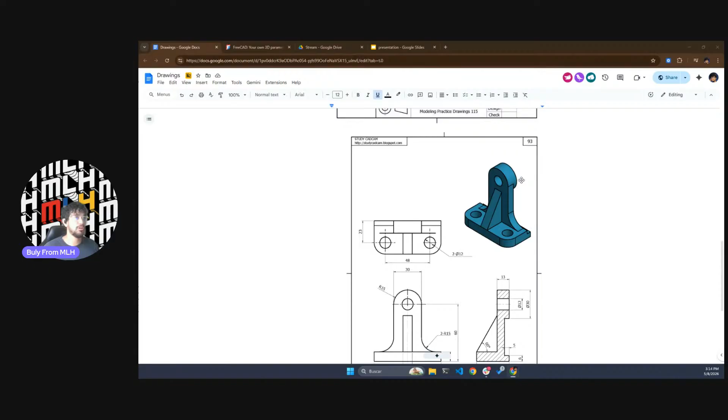Yeah, cool, okay so open 3D CAD, I'm sorry, FreeCAD. Where's FreeCAD? What? Hello? There we go, FreeCAD here. FreeCAD is opening, I can hear my fans at 100%. There we go, cool, okay this is FreeCAD.

Okay, this is how it looks like. These examples are not mine, these are examples that FreeCAD gives you. You can click on them, play with them, kind of learn with them. We won't be diving there. We have a lot of things here, like BIM architecture, empty files, open a file. If you have a CAD file, you can open it. A whole assembly, this thing right here is an assembly of pieces, so you create each piece separately and then you can anchor them together to create a whole piece.

And the parts, which we'll be working on today. Okay, cool, click on part, I think it's parametric part, and then God it's horrible. Okay, you have this, ta-da! No, what is this? I'll explain the basic things. We won't go through all of the buttons and all of the functions, just the basic ones, okay?

You can see we have the unnamed project here. Yes, you can see we have the body, and then we have the origin of it. I'll explain this a little bit in a sec.

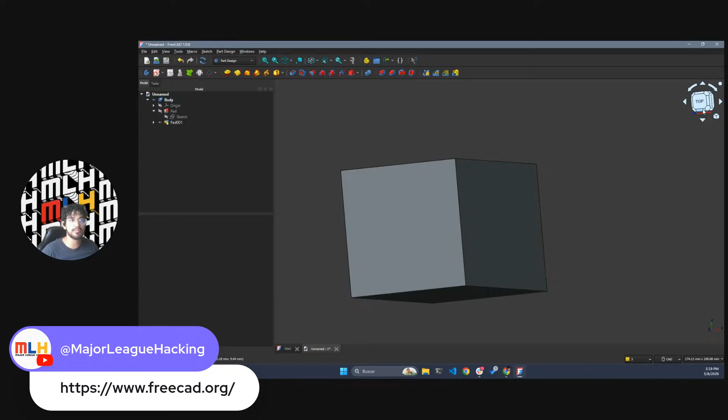So you can see this is a block. Okay, hey, I'm just seeing a square. Well, it's a block. If you click on this, the scroller button, click on it, and then click on shift. I'm sorry, what was it? Shift, control, no, right click? Oh yeah, so it was right click, and then shift, and you can move the part. Check that out, okay, and you can see this little map moving, right?

See that, yeah, okay, so again, right click shift to move. Okay, now hey, I want to move like sideways, not rotating. Click on your scroller and just move it around. See that, make sense? Yes. So again, right click shift for this rotation, click on your scroller and you're going to move in the same plane differently.

And right click gives you a little bit of a function, and your usual left click gives you a little bit of a function. For example, you can click on this space right here and start designing just on top of it. Okay cool, any questions?

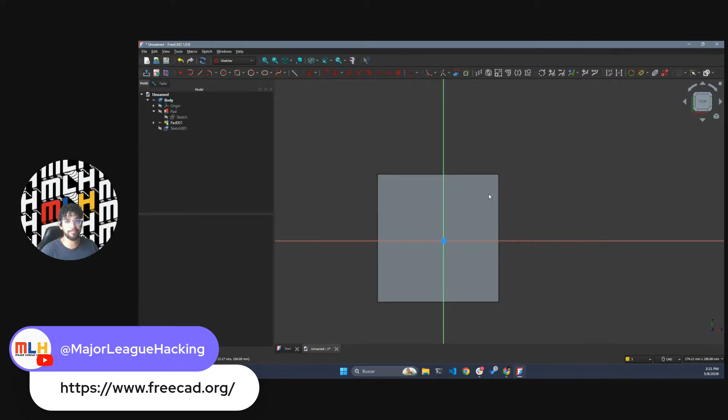Cool, yep, awesome, okay, so let's just open a new one. Oh, I said open a new, nope, no new. Should I maybe get rid of this one? Yep.

Should I open a new one? File. Can I create a new piece? I'm not sure. I have to save it. I don't want to save it. Okay, close this, I don't want to save it. Okay, I'll open FreeCAD again. There has to be a better way to do that, okay? Yeah, for sure, we're gonna do them together.

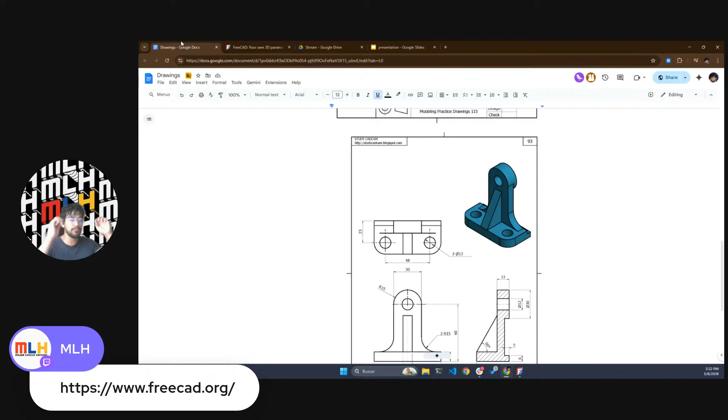But yeah, okay, so again, parametric part, okay, I'll leave this one on. Okay cool, now with the link that I shared, you can see, ta-da, you can see this. We won't be able to create this entirely, it takes a little bit of time, and we have an hour and 40 minutes, but I'll give you a rough idea of how to do it, okay? And then we'll go through 3D modeling, which is an interesting part of this. Cool, now you can see this is the usual schematic of the piece.

And maybe the first thing you'll say is, where do I start? That was great. Oh, that was beyond epic.

Okay, let's locate a center. Do you have... why don't I have music? Better? Okay.

So let's locate a center, and that center has to be strategic, at least for us. It could be this one right here, or this other center, or here. I like this center, this part right here, I prefer it. I think it's the most centered part in the whole drawing. So let's go with that.

Okay, cool, I'll open my iPad. It should be here, give me one moment. Good, I'm back, apologies, cool.

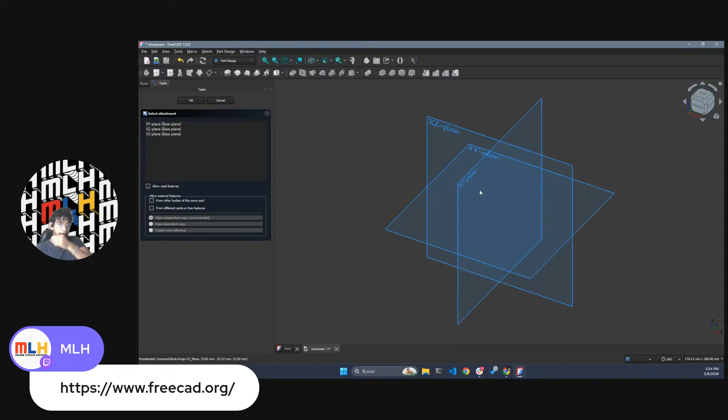Okay, so now the first thing we have to do is what I just did in a hectic way. I'll click on body, then click on this button right here, which has an icon like a paper with a square and a circle. Then you'll be given three options: the XY plane, the XZ plane, and the YZ plane. The one I prefer, and it's a personal thing, is the XY plane. Double click on that and you'll get this view.

Now why do I prefer the XY plane? I don't know, I guess I'd like to have Z as my third dimension, not Y. Some people have Y and Z as the front, but I like having Z as the third dimension. Cool, so you can use either plane, it's the same thing.

So far so good. Now we have a center here, you can see we have a point. That point is our reference. Okay, so let's start designing the piece.

Circle, circle, very easy, circle, circle. Go to FreeCAD, there's a circle icon here, can you see it? Click on that circle icon, then click on the very center.

And once you have it, don't just click on it and let it sit. Just click once, and you can see it changes dimensions, like it grows or it shrinks.

If we go to our design schematic, let me zoom in a little bit more. You can see that this circle right here is referenced with this weird symbol, 1.750. What does this mean? This weird shape, a circle with a line crossing between, it's your diameter, meaning twice the radius.

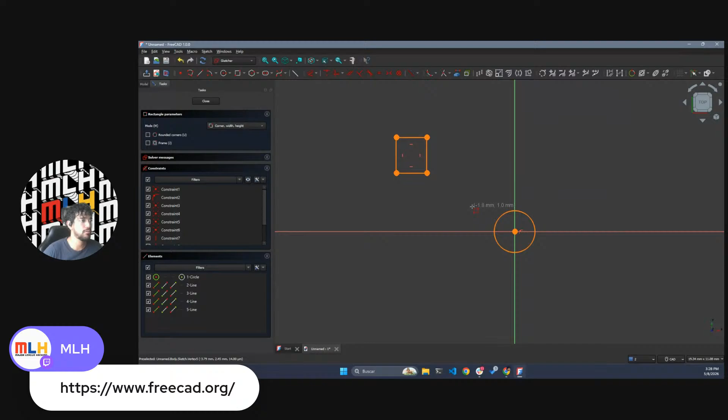Is that FreeCAD? Are you kidding me? Wait, if I want to create a new one here, why is it over constrained?

Why? So when you get a green color like this, it means your shape is constrained, meaning it won't move. Let me try to move it - it won't move.

Let me just get rid of this one, get rid of this point. Can I? It's maybe the over constraining thing. No? Yeah, okay. Maybe I'll create a circle right here. This one's white, and it can move freely.

Yeah? We don't want white stuff. That sounds weird, but we don't want white shapes. We want them green, okay?

For example, in this case, we can say, hey, point, click on control, and then point. You can see both points are selected, they're in green. Go to right click, and it says constrain coincident, constrain horizontal, vertical, perpendicular.

In this case, because we want both points to be touching, we will make them coincident. Voila. Now, why is it white? Even though I can't move it, I didn't set a correct dimension for this.

So again, I'm going to click D, the letter D, and now I'm telling it, hey, it's 1.750. Again, it's too small. There we go. Yep, and it's green. I can't move it - it can't shrink nor grow. Yep, it's constrained. Okay, cool.

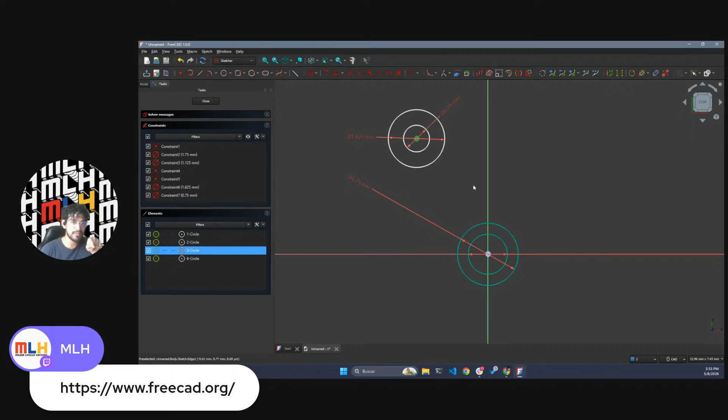Ooh, see that? If we take this, click on this point, hit Control, don't let it go, and then click on your y-axis. It's green. It was green, it's green now again.

You can let Control go, and then right-click, and we will... Oh no, actually no, it's not constrained. Click D, and you can see we can add some measurements here.

It was 0.750, like this. That makes sense. See this line? And then see that the circle is a little bit over the line? It's kind of the same thing.

It's still white. What? Oh, we constrained it to the y-axis. But what about the... oh, I'm sorry, we constrained it in the x-axis. It means it doesn't go left nor right.

But it goes up and down. Do we have a measurement for that?

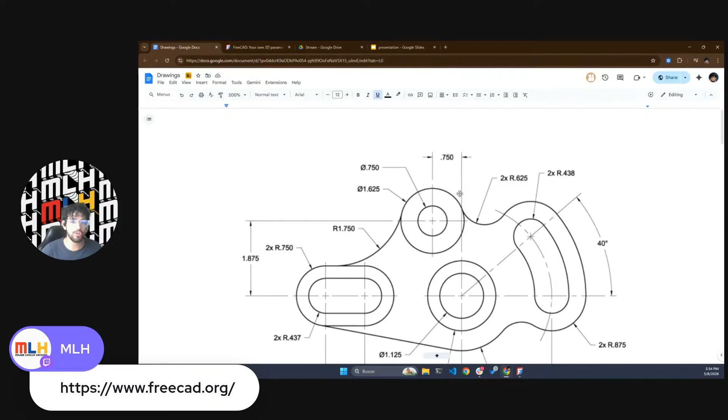And we do. From this center to this center right here, you can see we have 1.850 - I'm sorry, 1.875. Go back.

This and this. D as for dinosaur, 875. Cool, we got it. Give me a...

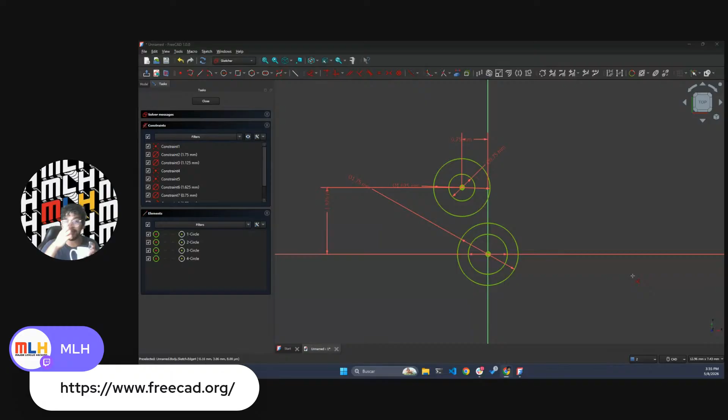Okay, I'm back, sorry. Yeah, for people who didn't hear me say it, I have a flu, the worst flu ever. It's really warm and I left my AC on all night yesterday, so my throat is killing me. Okay, let me just take a little break.

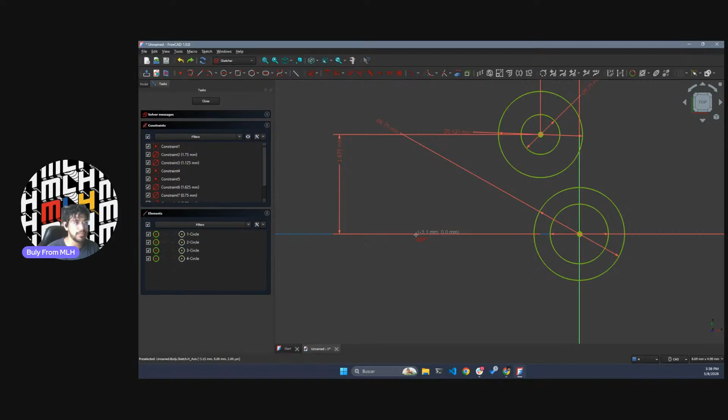So you can see again that this pill shape is in the center, and its centers are actually in the X plane. So go back to FreeCAD, click on the pill shape, and then for this just hover your mouse over the X plane, click once. I just clicked once and it grows with your mouse. Okay, so I'm not clicking, I just want it to grow a little bit more, keeping my mouse over the X plane.

Maybe like this - click - and then it allows you to make it either bigger or smaller. I'm not clicking, okay, I'm not clicking, I can move the mouse. I'm hovering the mouse, I'm not clicking. When you click is when you kind of select, okay, so...

We can measure it, and that's what we'll do. But just close eye, maybe right there. Okay, I clicked, and that's it. Same thing, click on again the pill shape, click on this center, click on this center right here, and a little bit smaller this time. Click here, voila.

Redundant, yeah okay whatever, do I have redundancy? Wait, what? Okay, there we go. Cool, so that's it. Okay, now this doesn't look like this, but we have measurements that we can follow. And check this out, here we have 2 times 2x, or 2 times R750.

Unlike this weird shape, R stands for your radius. Okay, so the radius of this circle right here, the bigger circle, is going to be 0.750. Okay, so...

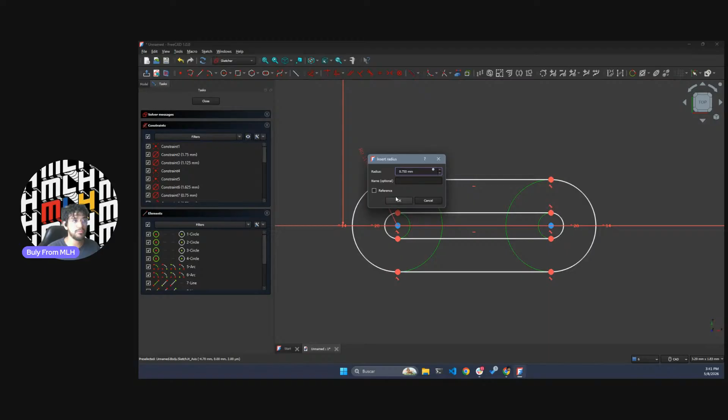D - now it gives you can see it gives you the R option and it says radius. Now the radius was 0.500. There you go - 750. Okay, see that, now it grew, and it kind of resembles this bigger pill.

Let's do the same. Now why does it say 2 times? Remember, we have one circle and we have another circle. Because we're using this pill shape, it automatically adjusts both circles, but if you're doing it by scratch, you have to adjust both circles.

Okay, go back to our schematic. It says 2 times again - 437, 0.437, that's the radius of this one. Again, scroll, click on this circle, kind of just put it right here, and then write 0.437.

0.437. Now careful, this for some reason has micrometers - it has to be centimeters. Actually millimeters. Yep, there we go.

Cool, so far so good. You can see this, now it's not green. I click escape to escape the dimension key. Okay, so I click D and I have this - can you see it? It's like a reddish icon under my cursor, meaning I'm using the dimension option. If I want to exit that option, click escape. See that? Now it's a normal mouse.

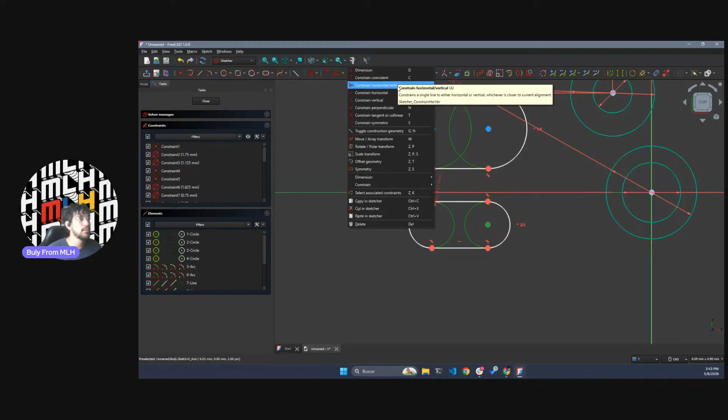Click on the center, control, and then click on the X plane, right click here, and then it says constrain coincident - it means it's going to coincide. Yeah, so it's going to touch. Okay, 3, 2, 1. Ta-da!

Same thing here. Now we can click on this center, click on this center with control. So again, the steps are: click, hit control, don't let it go, click on this center, let the control go, right click here, and then coincident. Ah, there we go. Okay, now you can see that these two are not coincident.

Yep, it's okay for now because we have the measurements here. Okay, so we can see that actually both lines, this one and this one, are actually the same length. Can you see that? Here, it's the same. The thing that changes is the radius of the circle.

Okay, so in this case, let's coincide the centers. So again, click, control, click, right click, coincident. Ta-da! Okay, now you can see it's still white because those lines have to be measured.

Okay, let's click on this line, click D. You can see the measurement here, put it up, and now I don't remember how much. Oh, 1 centimeter - okay, so it's 1 millimeter. There we go, see that?

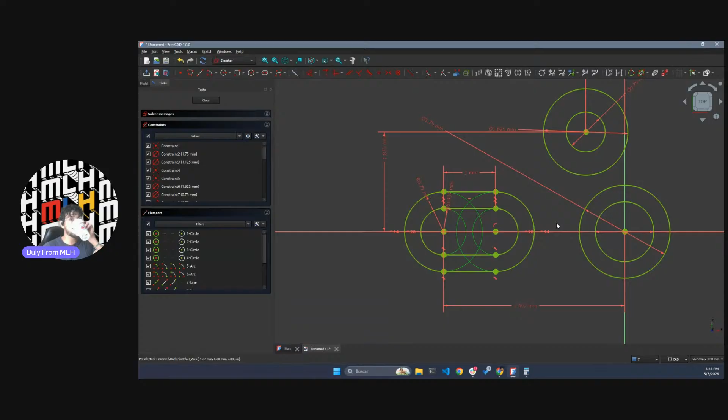Next step. Okay, not Slack, this. Now, this is a little bit not very intuitive at first, but when you get used to it, it's easy.

Okay, you can see there's an arc here. See that? There's an arc, and it has a radius. And you'll say, hey, why would an arc have a radius? Why doesn't it have like an angle, degrees, instead?

Because when you're designing or drawing, you usually use polygons and circles. So if you think outside of the box, this is a circle that goes like this.

That's the worst circle I've drawn. Do I have a pen? Oh, I have a pen. Oh, cool, nice. Do I have a pen? Oh, here it is, editing mode. Nope, is there a pen option? Insert. Say what? No, right? Mode. Editing, no. Ruler on the, I don't know.

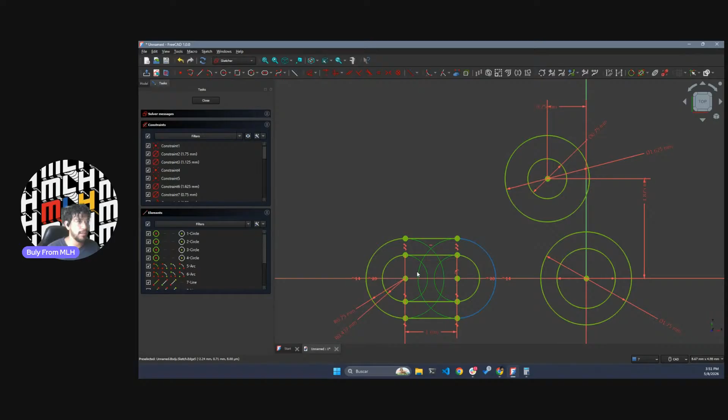Okay, so you can see it's kind of from this point all the way up to this point. It's kind of from this point all the way up to this point. Okay, so we have two options.

We can create a circle, match the radius, and then cut it, or we can use the arc by center. You have a bunch of options: arc by center, arc by 3 points, arc of ellipse, and more. Let's use the center one.

Now, why is that? We don't have a center here, right? There's no center. Well, we know that the center from this point to the center, it's 1.750 because it's the radius. Okay, let me paint it. Why not? Maybe this is easier to understand. We have a circle.

We don't have, it's like, maybe like this. We have it like right here, like this part is not, something like that.

Okay, we know that from any point in the circle to your center, it has to be the radius. So from this point to this point is radius, this is radius, this is radius, maybe this is radius. Okay, how will you know the circumference of that portion of the circle? Ah, you got it. You just know by the fact that it touches tangentially this pill and this circle.

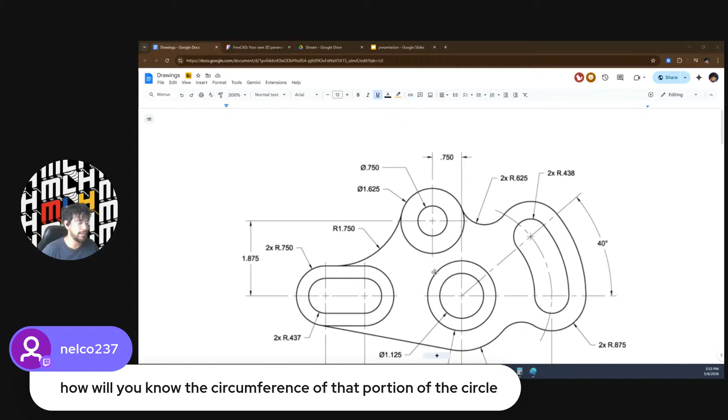Okay, now let's do it. Maybe it's easier if you see how we do it. Click on the arc option, and it'll ask you - I think the first one is the center. See that? What was the measurement? Remember, it was - oh shoot, I'll just get rid of this. 1.750. Enter. And then we have the circle.

It's not where it's supposed to be, but bear with me. Now let's draw where the circle or arc is going to be. We can just theoretically draw it from here to here. It's not placed where it should be, but that's the next step. Let me repeat this: arc by center - you don't know what the center is, okay, but we know the radius.

Click on wherever you think the center is going to be - it's not important. Now you see there's one arrow, and that arrow means it's the radius, 1.750. You can see it here, R, yep.

And then I'm not clicking, I just hit enter, and then I have the option to draw from where to where the arc is going to be. We know the arc has to be from this circle all the way up to this point, so we can draw it from the point all the way up to maybe this point right here. Now I still have the arc option - I click escape, and now I have the regular mouse.

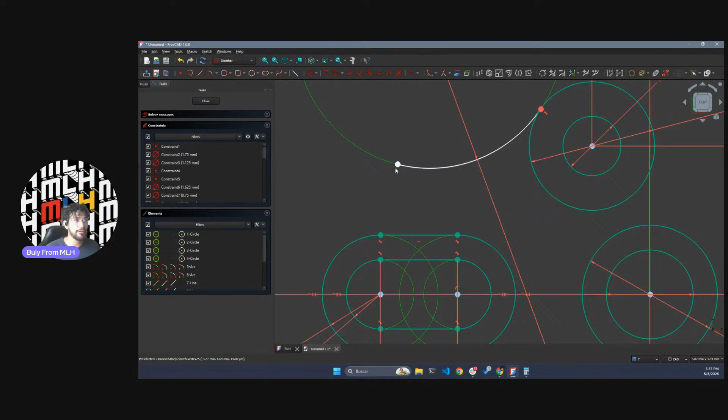Now we have the radius. We don't know where exactly in the circle it is, but we know that this end of the line and this point are coincident. Click on your point, click Control, click on your other point, let it go. Right click in space and coincident. Oh, there we go, now it's green.

Now maybe you'll ask yourself, what the heck? Wait a minute, this shouldn't happen. Maybe I'll remove this. Ah, then we got something wrong. Wait a minute, yep, I see that. Is the radius okay? 1.625. 1.625. 0.75. Yeah, that should be it.

Let's do it again. Let's tangent this. Ha! Wait a minute, give me a sec.

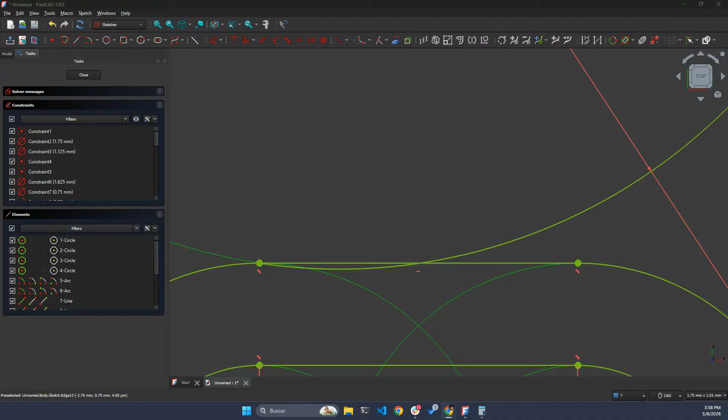I'm back. Okay, nelco says from the diagram it's hard to see that. I think it stops before. Oh yeah, for sure, it has to stop. This doesn't make sense. But 1750, did I get it wrong? Maybe there's something wrong in my schematic, maybe this is taller than it should be. 437, 437, 750, 75, that's fine. Yeah, that's weird.

Okay, I have an idea. Let's do something, you can see this icon here: halfway between two tangents. Yeah exactly, let's tangent it instead of coincident it. That's actually really good, really good, Michael.

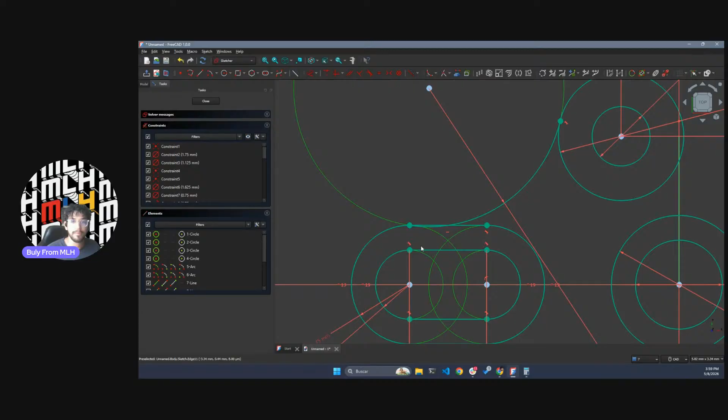Okay, remove this. Click on this red icon, which is like a line in a semicircle. Click on it and then hit delete. Now it's turned to an aqua color, that means we can move it.

See that? Oh wait a minute, what? Oh good, I just removed one that I didn't want. Okay, let's redo it. No, let's redo it, I said redo. There we go, so we're here.

Again, same step as before, I just Control Z everything, okay. Tangent this, and then click on this point. Control, click on your line. Is it in the line? I think it's in the line. So click on the line, right click, tangent. Ah, ta-da! There we go.

Yep, now it's not overlapping, so it's a little bit before. Sometimes you gotta experiment before you do it, because in the schematic it doesn't say where. Yep, but now it's green.

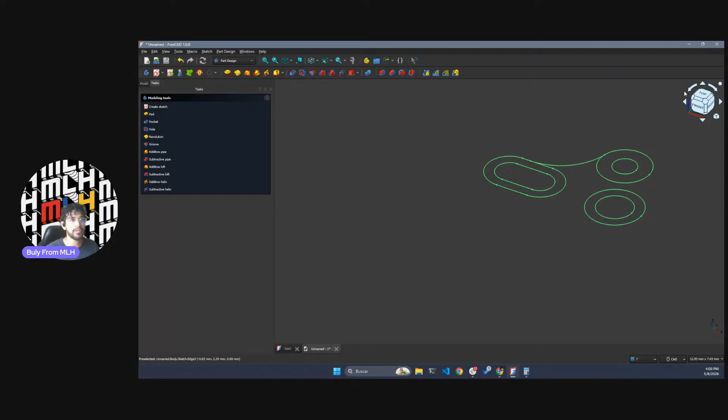See that? I can move it around. Now if you want to see it without the measurements, hit escape. Cool, now this is what we got. Now we know the basics, okay? Now this is taking too much time, let's go for this piece, okay?

If you want to continue with this piece, I can challenge you to do it, but later, this is not a pill. For example, you'll create a circle, another circle, and create two different arcs, and then just cut the circle right here. You can use the cut function. Cut, there we go, this one. It says create fillet, okay? You create the fillet and then you cut. Now everything is green, so you cannot cut. But yeah, just experiment with that.

Awesome, so let's just leave this drawing aside. We got the basics of how to do it. Let's go to 3D. Let's close everything, don't save. Parametric part again. Model, and we are back in the blank.

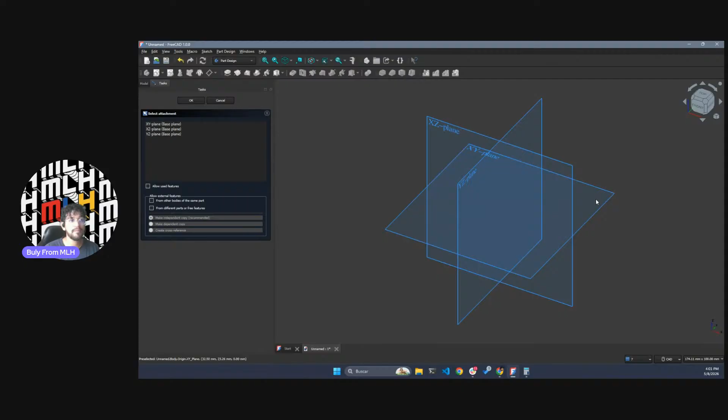Okay, remember what the first step was. Click on your body, and then click on this icon, which is the sketching icon. Now first time it says, hey, where do you want to draw? Again, I like XY plane. Double click on XY plane. Cool, yep, all good, nice.

So this is going to be more fun. Now you go like, what the heck, where should I start? This is hard. It's not, you get the hang of it. Okay, let's do another one.

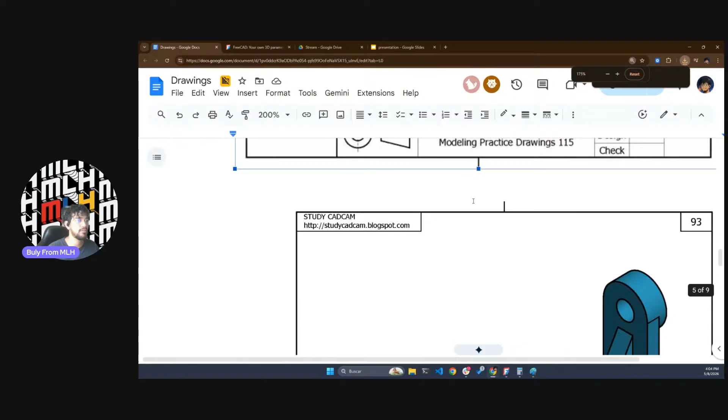Yeah, let's screenshot this part right here, from here all the way up to - oh, this is important. Okay, now I'll open this with Paint. Gotcha, thanks, nice. Okay, so we got this. I wanted to do it in Paint so we can use colors with this.

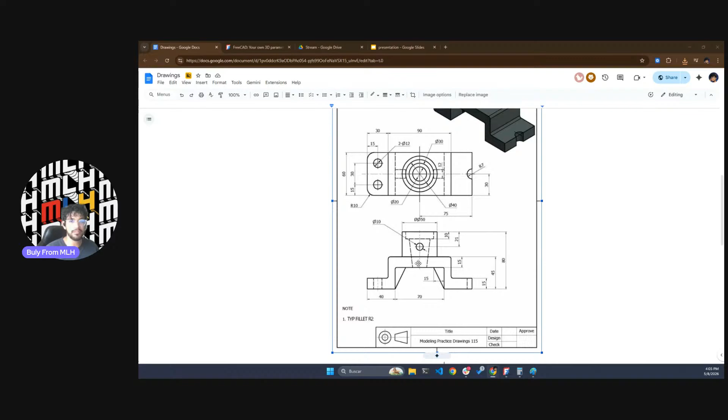Cool, so check this out. We're going to do this silhouette, this one right here. You see, it's just one shape, and then you do 3D on it. See that? Let's do it. So we start by creating the shape.

How do you do that? Easy - go to your lines, click on the line icon, and click, drag, click, drag, click, drag, click. That's what we're going to do. Again, click, drag, click, drag, click, drag, click. Okay, do it with me. Click. Okay, try to. Let's do it.

Should I? Okay, maybe - don't click yet. So click, drag, and then hit tab. You see that we went from the measurement, like the actual size of the line, to its angle. Let's do this, 0 degrees. See that? Now the line won't toggle, it just grows. So click.

First line, which is this part right here, this line right here. Let's do the whole shape. Again, click, tab, minus 90 degrees, enter. You got a line, maybe somewhere around right here. Yeah, and then a vertical line - I'm sorry, horizontal, vertical, horizontal.

Okay, let's do it real quick. Like this, 0 degrees, enter. Click. From this point, click, drag, tab, minus 90 degrees, so it looks down. Enter, click. Yeah, what next? Then a line maybe somewhere around here. So this line stops here - it doesn't have to be exact, we're going to measure it later.

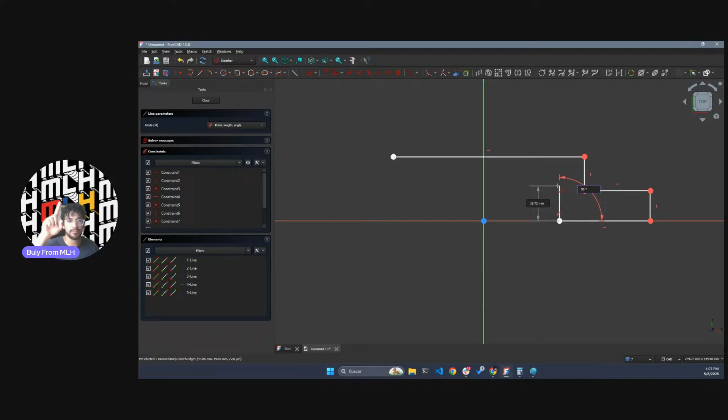Line, tab, 180 degrees - yes, it doesn't move. And then maybe somewhere around right here, same thing here - up, 90 degrees because it's 90. Enter, click, click, drag, tab, 0 degrees is okay. Yeah, whatever, oh, so change it to 180. There we go, so it goes backwards. It's somewhere around right here.

Click, click on the point, drag down, tab, minus 90 degrees, enter, click, click again, drag, angle is 180. Yep, right here - click, drag, 90 degrees, enter, click, click, tab, 0 degrees, drag maybe just right here, and then line, tab, 90 degrees, enter, and it touches the point. Oh good, I hope you got all of that.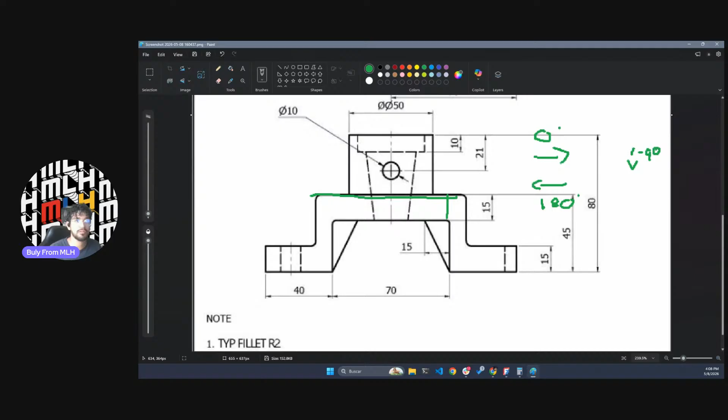Again, click, drag, tab, and then if it's flat looking at your right, it's 0 degrees. So let's put it here - it's right here, it's 0 degrees. If it's right there, it's 180 degrees. If it goes down, it's minus 90, and if it goes up, it's 90. Okay, so again, click, drag, tab, your angle. Click, and then click again where that line ends and start your new line, and you create this silhouette.

Okay, so I'm going to get rid of this. Oh God, okay, say what? Okay, maybe like right there, okay cool, so now let's measure this thing.

You can see that the bottom line is 70 millimeters wide. Go to your bottom line, click on it, hit D as for dinosaur. You can see you have the measurement here, oh no. Click D, and the number was 70. Cool, okay now next line. Oh, you can see this height is 15. Go to your height, click on it. If you had D selected without hitting escape, it automatically does it for you. Click, 15. Same thing for this line, 15.

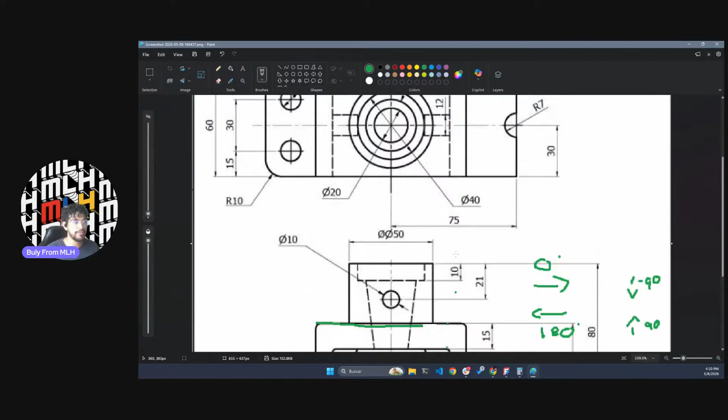Okay cool, we got 3 lines - these 2 lines and this middle line. Now this upper line right here, it kind of doesn't say, right? It doesn't say here, but it does say here, which is wrong. This upper line right here is - where is it? 70, 15, 45. Yeah, it should be 90 then. Yeah, it's 90, see this? Let's look at our schematic again, the complete one.

This square right here, it's this square right here. Okay, you gotta think outside of the box. Just look at the things in 3D, even though they're in 2D.

Let's see, is there a way to just make one side? Yeah, you can mirror one side of it. It's a little bit of a pro move, but yeah, your intuition is right.

You have here... where was it? I think it's this one. Carbon external trim, no, one of these is the mirror. I think it's this one. Just hover over here and you'll find the mirroring. I think it's this one. So you click on everything, and then you mirror it based on this line.

So you just create this part right here, and then you'll mirror it based on this line. So you do like a book, like this. Yep, but let's do it one by one.

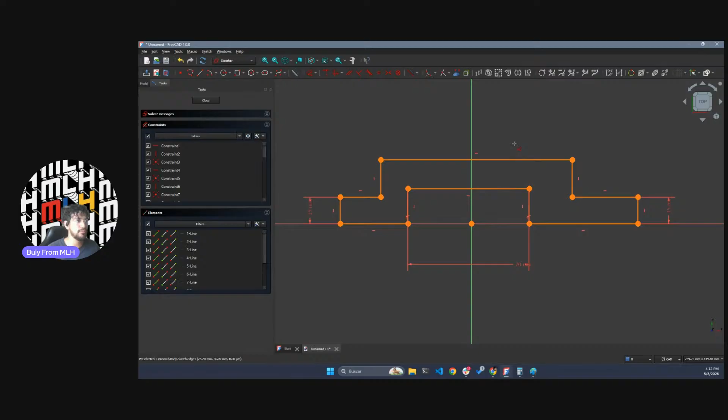Okay, cool. So you can see that this is 90. This square right here is 90. So that means this is 90. Cool, now next one.

Between this line and this line is 15. Okay, so let's do it. Come here, click on line, line, and then we have here 15. Cool, it's still white, we have more constraints to add.

Maybe this line right here should move. This one right here, this one. Let's find it, you can see it's 40, right? If it doesn't tell you, hey, this line has a measurement, then you can infer that this one is the same. So we have 40 and 40.

Okay, go back, click on line. D as for dinosaur, I said D as in dinosaur. 40. Same thing here, 40.

So far so good. Now we know that between these lines is 15, but we don't know the actual size of this line, this one. Go back to your schematic, and you can see it doesn't say, but it says, hey, we know that this one's 15, we know that this one's 15. We don't know what this line is all about, but we know that 45 minus 15 equals 30, and this line should be 30, because it's this 45 minus this 15.

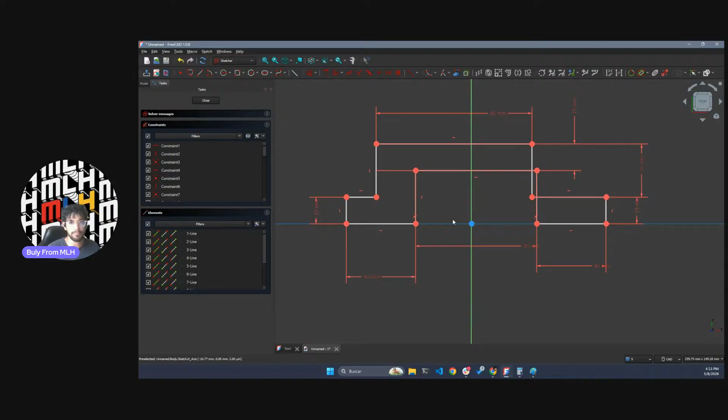Okay, we'll do it. So if this line won't grow, it means that this 30 actually also applies to that line. Again, if you don't know why it's white, move around and you can see that the line that's moving everything is this one. So let's click on the line, and then go back, and you can see this line is actually this line right here.

Can you see it? It doesn't say in this part, but it says here. This line and this line are these lines. But you're just looking at it from up, from the top, not from the side.

Okay, so click on here. D, was it 15? Oh, 30. 30 here, same thing in this line. Okay, it's over constraining, escape.

Don't click on anything, cool. Now, why is it not constrained? You can see it's over the x-axis, but it doesn't know where its center is. Let's let it know.

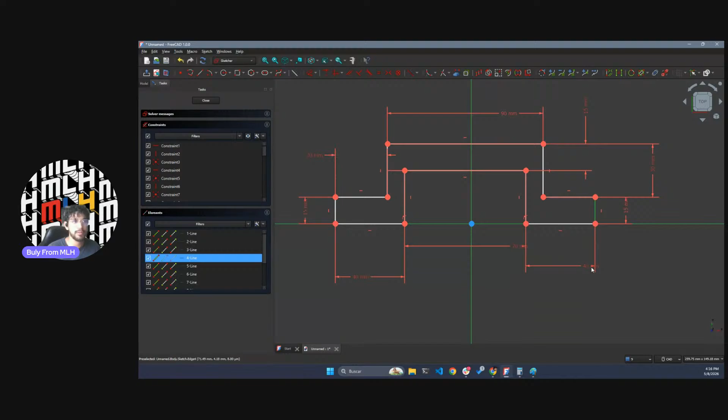Y-axis, control, and this line right here, or actually this line right here. We selected these two lines, and we know from this center to this line it's half of 70, which is 35, plus 40 of this line. So it's half of this, because we have a line here, half of 70 which is 35, plus 40 equals this. I hope it makes sense.

Cool, I'll just get rid of this. Nice, go back here. D as in dinosaur. Oh, wait a minute. Hit, click, click. D as in dinosaur, click. It was 35 plus 40, 75.

Cool, now it's green, and now FreeCAD says, hey, now you're cooking, and now I know what you're doing. You can see that all of it is green. It is constrained, okay?

Cool, so it's constrained. Now what? Click on model, click in this space with one left click, and then hit escape.

Now you can see your schematic as in a 2D drawing, but in the outside world. Remember, control and then right click lets you move it around. Shift and right click lets you rotate it. It's not a 3D piece.

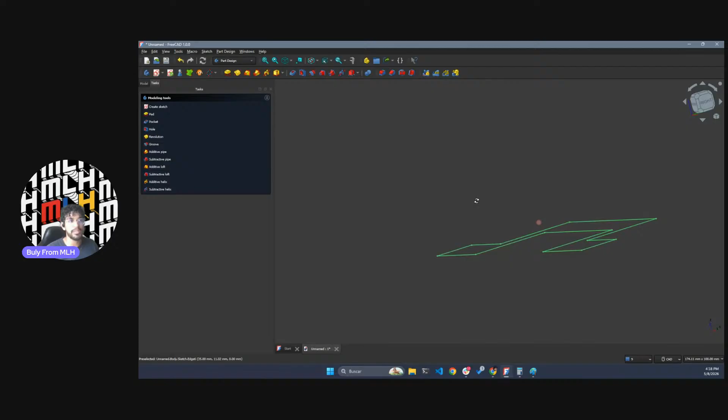Don't hit enter, just click once. And here it says, hey, it's a type dimension. Yes. And what length? Cool.

Go back to your schematic. The length is actually this number, can you see it? It's all of this, it's the whole piece. So it's 60. Go back, and here, 60. Enter.

Ba-dam! You see, from a silhouette, again shift, right click, you can rotate. You can see that this is the top.

Let's rotate the top, clicking on this arrow. This silhouette right here is your silhouette right here. If you rotate it, let's do it like this. If you see it like this, it's actually, look, you're seeing it this way. See that?

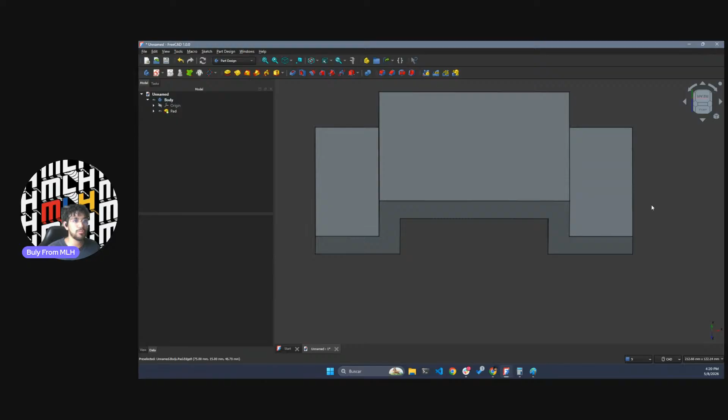Go to your FreeCAD. Click on, with your scroller, click on the scroller. Again, shift, and then right click, kind of turn for you to select this line. Not the plane, not the plane. Line, click on it once.

Scroll out. Yeah, and here you have something called a fillet. A fillet is going to do like a fillet, it's not like an angular cut, it's like a fillet cut, okay, like a round cut.

Click on the fillet. And now it says, hey, I know that you're talking about this line. It actually created a fillet, and it says 1 millimeter. Yep, it's the radius of the circle that it's going to create here. See the circle? This is radius 1.

We don't know, right? Like it doesn't say, ah, but there's a note. Note, typical fillets are R2, 2 radius, or 4 diameter. Okay, 2 millimeters, maybe it's easier to understand. 2 millimeters of radius or 4 millimeters of diameter.

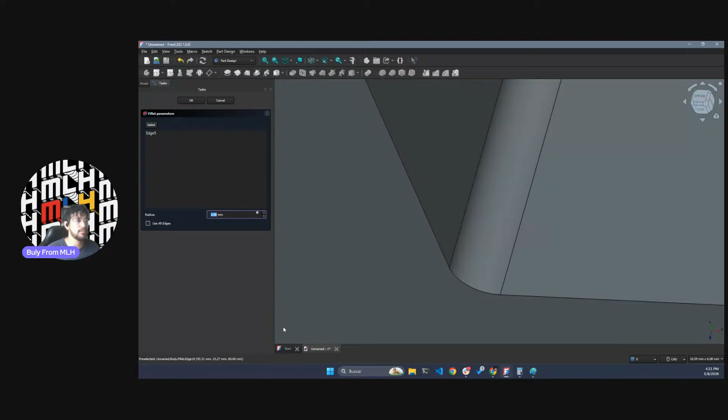Ah, that makes sense. So I go back, instead of 1 it's a 2. Enter. There we go, see that? Now it has a fillet to it.

Bully, we need to do the fillet on every single line. Well yeah, it's easy. Line, fillet, 2, enter. Again remember shift right click, line, fillet, 2, enter. Last one, line, fillet, 2, enter. There you go, see that?

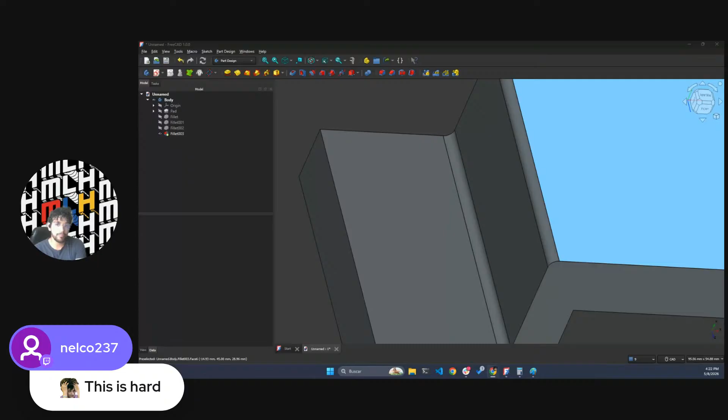Because if we were to create this piece by creating this box, and then another box, and then a box, and then a box, and another box, it'll take forever. You just use your imagination and say, hey, I can do this whole silhouette, 3D, cut, easy peasy. Okay, I hope Nelco doesn't find this hard.

Now, this looks better, right? Let's kind of take a look at it like this. Compare it to our image. See the fillets there? Nice. Bully, there's a fillet here.

You can actually see it here. There's a fillet, and there's another fillet. And it actually says, where's Paint? Here it is. It says this one is R10.

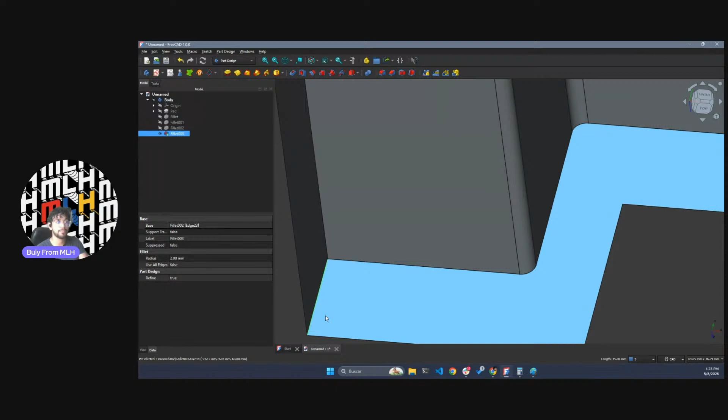Nice, do the same thing. Click on your line, not pane, not plain, line. Go to fillet. Remember how much was it? 10, so radius is 10. Ba-dam! Isn't this beautiful? Same line here, yep, got a line, fillet, 10, enter.

Now this is good, now this makes more sense, right? Can you see this? You can see that this is trimmed, and this one is trimmed. Cool.

Now, next step. Okay, you can see in the picture we have like a circle here, which is like a cut. Yeah, so it's a cylinder that goes down, but it's not a shape by itself, it's a cut. So it's a cut like this one, and this one cuts. You can see we have 2 circles in 1 circle.

Lucky for us, these 3 circles are in the same plane. So what we can do is draw these 3 circles and then say, hey FreeCAD, I want you to cut down, I want you to erase or remove whichever material you have in your way with these 3 circles. Okay, cool, so let's do it.

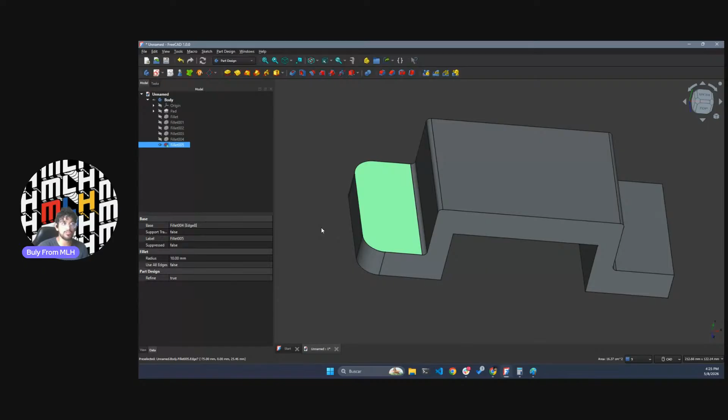Click on either this side or this side, okay? Whichever works, just click once. It turns green, then click on your drawing, sketching tool that we used before. Where am I drawing? What's going on? No worries, you are drawing on either this or this plane, because they are in the same height, so we know you're drawing over this, not over this. You're not drawing here, you're drawing here, which is this part, not this part, this part. Even though it looks the same, we are looking at a 3D shape in a 2D way.

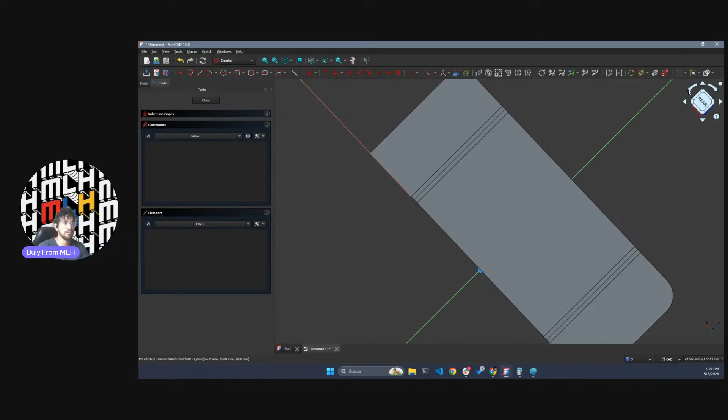Cool, let's orient ourselves. Can I have a decent rear view? Oh, there we go. Now this makes more sense when we look at it like this. So this is this, yep, this is this. Okay, now we have a circle here.

Let's start with that circle. You can see that I want to click on this line because I want to make a circle coincident here. Maybe FreeCAD is buggy. I want to click on this. I can't, because this is a 3D part, and I'm trying to sketch over it. FreeCAD says no, no, no, you can't do it because it's already a shape, it's not a sketch, it's a shape. There are infinite amount of points here, so FreeCAD just says no.

But we have a trick. You can see there's a line and then dotted lines. If you click on this, you can see that all of your shapes now are blue. Click again and they'll become white. What does this mean? If they're blue, it means it's an imaginary line. It helps you locate yourself, like in this case, in a 3D shape. It helps you draw 2D shapes. And whichever line is blue, which is imaginary, created, it won't affect your 3D sketch.

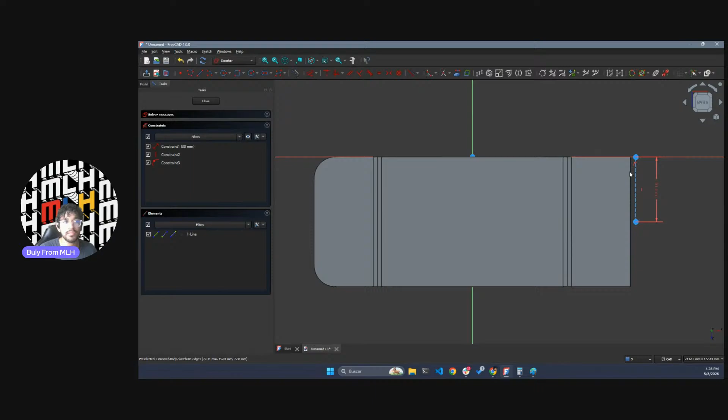It's not coincident with this line, we have the same issue. Not really. We know that from this point, which is 35, yep, 35 there and 35 there. So it's 35 plus what? Plus 40. 35 plus 40 is 75. Remember the calculation we did last time? 35 plus 40 is from here all the way up to the center. Ah, we got the center.

You click once in the center, click Control, click the next center, and then D as in dinosaur. And then, what was it? 75, right? Oh, now we got it. See that? It's not touching physically, but the measurement is the same. It's the same length, so it's there.

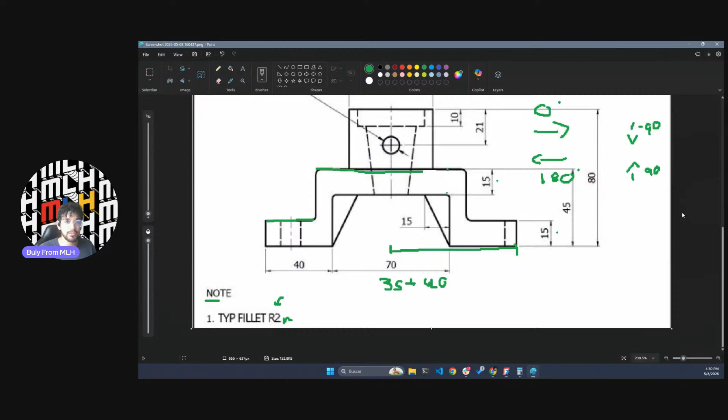Now let's change this to a real line. Click again on this dotted line icon. It's white again. Click to select the circle. Now the circle is going to be in the center. Yep, it's not going to move, but it's going to change its size. Go back to your schematic. R7, see that? It means radius of 7.

Here it's saying, hey, you see the two arrows? The two arrows mean diameter. So it's easy, if we are working with diameter, it means twice the radius. The radius was 7, diameter has to be 14. There we go, easy peasy.

It's already there because we're going to cut. See that? There's a circle. We're going to cut through the whole piece. It's okay if we leave this part of the circle because there's nothing here. So it's okay to leave this part of the circle.

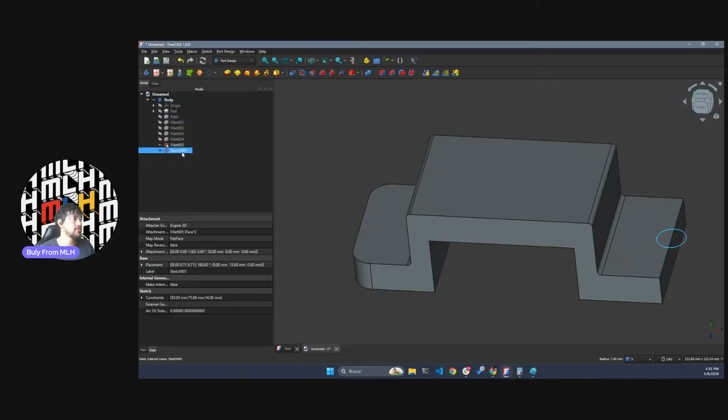Now, if you're feeling a little bit more adventurous, then what you could do is create a line from this point to this point to close the shape. You cannot leave shapes open, they have to be closed, and remove this part. It's just a plus that does the same thing, so we won't waste time on that, okay? Give me one second.

Cool, I'm back, okay nice. So now we got two circles to tackle, one and two. We got this one right, okay, let's do the same thing.

Let's create a line, a dotted line that goes here. It's an imaginary line that'll help us locate ourselves. Okay, go back to FreeCAD.

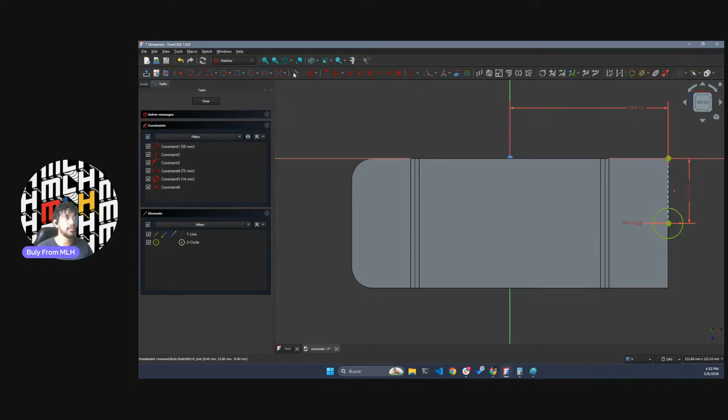We know that we want a line, again dotted line here, click, so it's all imaginary. Click on your line, maybe right here, it's okay. Should be 90 degrees, and the length was 30 for the center. Oh, my bad.

Yeah, maybe, let's see. Yeah, let's do it like right here. It doesn't matter, okay, we just want a straight line for us to locate ourselves. Okay, cool, now.

D here, and then this was 60. Okay, so 60, cool. Now remember, if from this line to this point we had 75, it's the same thing on the other side, okay? So dot, 75, cool. Now this line, you can see it's touching.

Remember, dotted line means imaginary line. Okay, cool, now we will need another line that helps us, which is we can grab the center. Sadly for us, the center is not here, the center is here. So what we'll do is use the x-axis as our advantage.

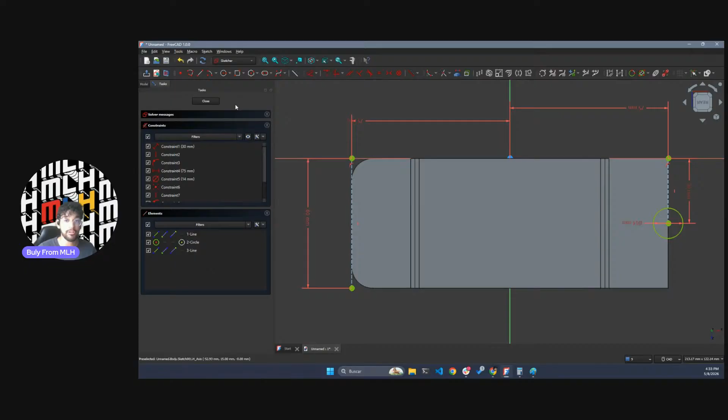Okay cool, so we know, you can see that we have two circles, okay, two real circles. I said two real circles, one and two, yep, just there. Why not? Now I know for a fact that both circles, it says here actually, two of 12 diameter. Can you see it here? It says two of 12 diameter.

Let's go back to our circles. Click on the first circle, click on D, and then 12. Same thing here. Well they're still white because even though they have their diameter, we don't know where they're located in space. We have to stick them. We'll do that based on this and based on this number.

Okay, let's start with the 30. First of all, we know that between this center, you can see the line, center and center, we have a 30 millimeter distance. Click on the center, click on the center, should be 30. Okay cool, now next thing.

Now if we move them, they'll move around, okay, but they'll keep that 30 millimeter constraint. Okay, now we know for a fact that both of the centers are 15 away from the dotted line that we created. Can you see it? 15, dotted line. Go back.

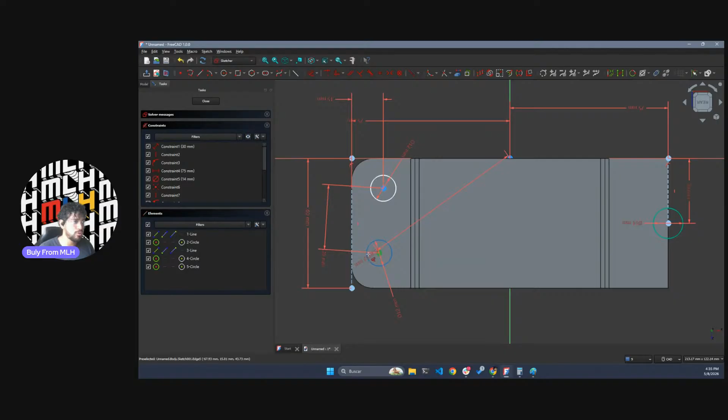Click on center, click control, click line, we got the two selected. Click on D, and now we got 15. Cool, why isn't it green? You're missing this center too. Center, I'm sorry, again, click on center, click on control, click on line, and you got 15.

Why isn't it green? Like what are we missing? Again, wiggle it. Ah, we don't know where in the X range they are. Now we know that this is the Y, we need something more, and you can see there's another number here. This 15 refers to this center right here and this line right here, or this center here and this line right here. Can you see it?

Okay let's do it. Center, control, line, D, 15, enter. We go, now it's green.

Yep, any questions now? I know it has been a lot, but do you have any questions? My hair is kind of weird.

Oh good, I hope all good. I know it's a lot in a short time. Nice, hey Kanime, cool, okay I guess you don't have any questions.

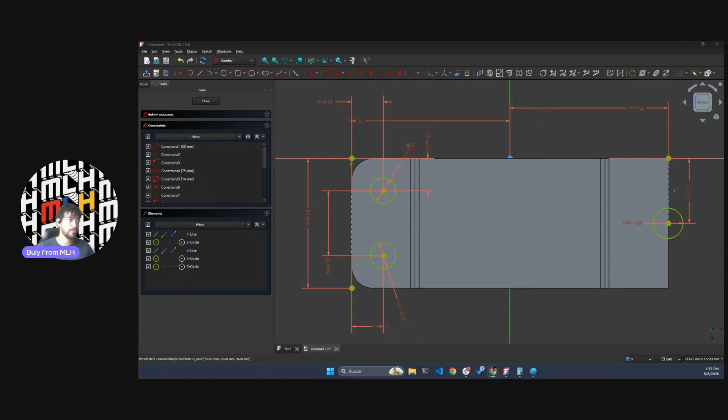It's green, so we can 3D this. Okay, escape, escape, escape, escape. There we go, you can see your circles.

It's time to cut. Click on your sketch, it's selected. Click on... it's a pocket, not a hole, a pocket. Click on the pocket. And now you can see it pockets this. Okay, awesome, thanks Sammy, cool.

Now we don't have anything down, maybe it's not the best practice ever, but you can just do 50 millimeters. There's nothing down, we just want a hole from here to here. You can also use the hole, but let's just use pocket for now. Okay.

See, it created a pocket from this plane downwards 50 millimeters. Now careful, if you have something down, you have to measure this height and then pocket the height. For now we have nothing down, it's fine. And you can see now this resembles a little bit more our piece.

Let's check it out, hole, hole, hole, hole, hole, hole, all good? Nice, cool. What are we missing? We're missing this cylinder, which has a cone shape inside, and just one hole, and I think we're through. Oh, and this line right here.

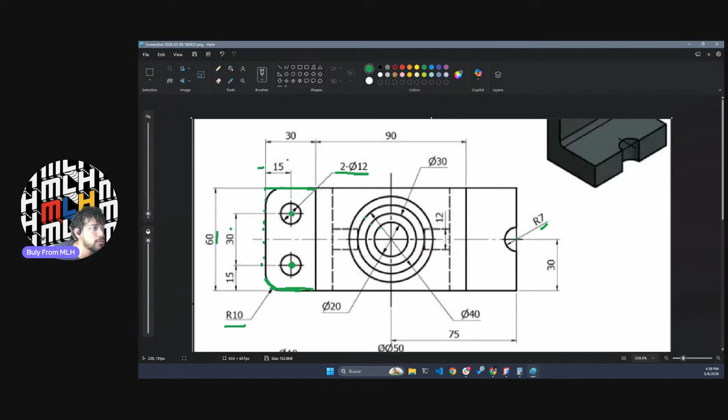So now what? Okay, now let's go to Paint because this is difficult to visualize. We have 1, 2, 3, 4 different circles. Bear with me, let's just use a different color for each. I'll do 1, 2, 3, 4. All good? Okay, let's start with the outermost circle, and then we'll start to cut.

Outermost circle is maybe not green, I'll just choose blue. There we go. Now we know we have the biggest circle. Let's look for the arrow that's pointing to that circle. We don't have it... we have it here, see this? Diameter 50 between this and this, which is the big circle. See that? It's not here, it's here. Okay, cool. Now it has to be in the center.

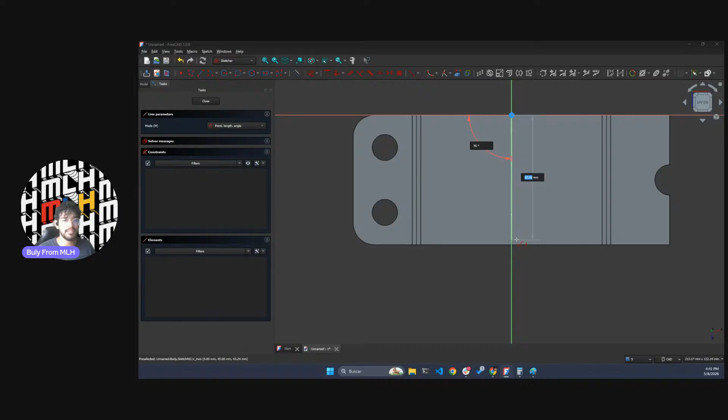We'll do the same thing as we did before: imaginary line, create a line from this point all the way down, angle 90 degrees, and the distance is going to be 60. Okay, so we have the whole thing. Actually 30, why? Because we want the center, and we know if it's 60 total, 30 is half of it. Back at this point right here...

Create real lines, not imaginary ones. Click on the circle icon, click on the center that we just created. It was 50, remember? It's not explicitly here, it's here. See this 50? Okay, so 50. And it's green, right? It's simple, it has its center and it has its diameter.

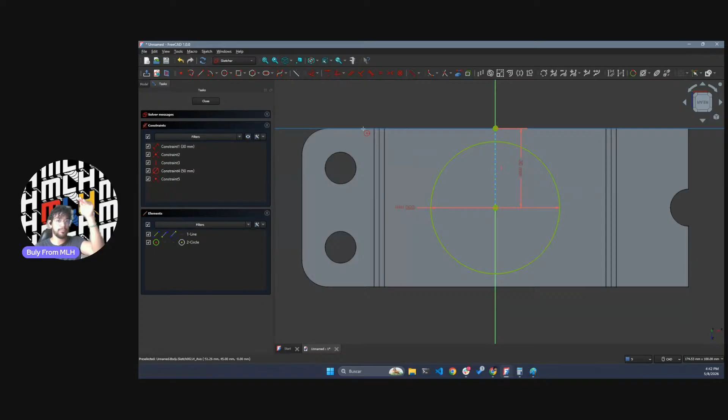We're happy, okay cool. Now, first step, let's make this into a cylinder. Get out with escape. Select your sketch, which is usually selected. Pad, which is this box floating. Now it's creating a cylinder, but we don't know how much. Let's check it out, let's do math again.

FreeCAD, I want you to do it as a 35 cylinder. But cool, now it's a cylinder, and we can take a look at our image. It looks like it's cut, and you can see the different cuts here. Actually you can see them here, each circle has a color, and each color is a cut.

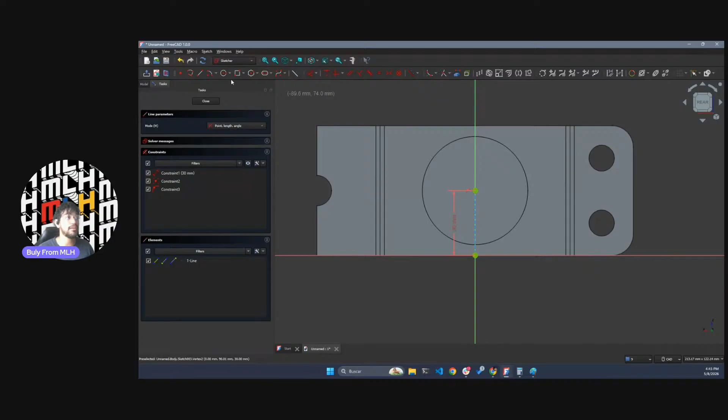Cool, yes again, I'll quickly explain again why. We know that this is 60, half of this, which is the center right here, 30. Okay, cool. Now that we got the center, add in a real circle with a 40 millimeter diameter. Enter, it's green, it's good to go.

Now let's pocket this. Escape, escape again, we got the circle. Now go to pocket, not hole - if not, you create a hole from up to down. Let's create a pocket. How much is this pocket? You can see it actually says here 10. Can you see that? This, from this lines right here. Oh shoot, it says 10. So 10, yep, it's easy. Now we got this pocket.

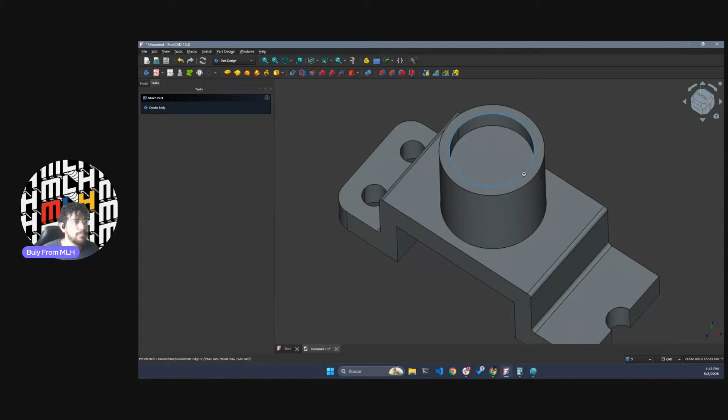Well, it looks weird, it doesn't look like the image. Well, hold on, it kind of looks. Check this out, this pocket right here. It's this pocket right here.

Okay? Let me drink some water.

Ah, good, we have 15 minutes. Okay, so now what is the next step?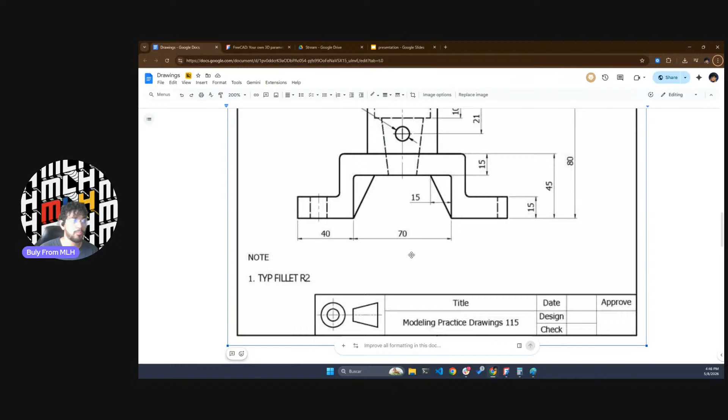We have to create a cone, not a circle. You can go about this two ways: start from the bottom and create a hole upwards - start here and cut a hole upwards, and in the end it's smaller than the other holes so it's fine. But no, that won't work, you have to do a cone. Okay, let's do a cone.

So for a cone, we need two variables or two pieces of data: the bottom part of it and the top part of it.

The bottom part is the smallest circle, and the smallest circle is orange. Can you see these two arrows? It's 20. And can you see the other circle, the brownish one? That one is 40. Use the colors - brownish is this one, and the orange is this one.

Let's do it. So we have to have two sketches, one for the top and one for the bottom. Start with the top - click on the circle, click on sketch. Same thing: an imaginary line from this point, 90 degrees, and I want it 30. So I have the center of it.

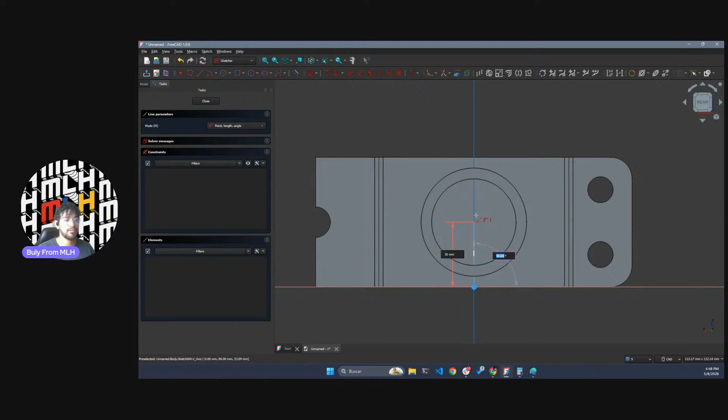Now, the next thing was the circle we said was 40 - 40 as in diameter. So, real circle: click on circle, click on the center, 40 diameter, enter. That's it, it's easy. We know where this line came from, so now we know the circle.

Get out of the sketch, and remember, shift right click. Now click on this plane and sketch. Again, an imaginary line from the bottom up - it's a 30. Enter.

Okay, and now this is the bottom circle. A real circle of 20. Yep, does that make sense? We have the top circle and the bottom circle. With those two, we're going to connect them to create a cone. Now, get out of your sketch.

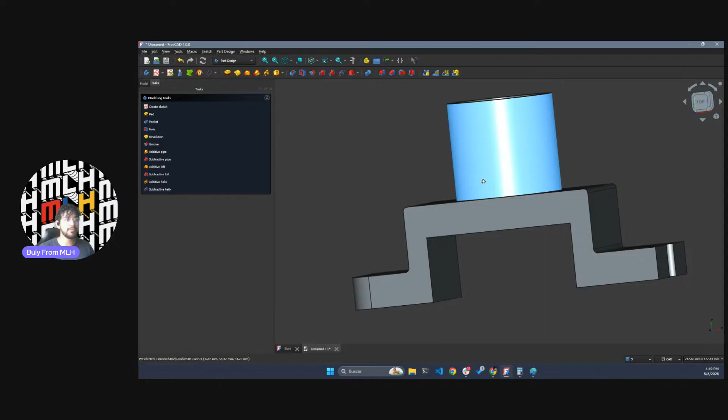You can see there is a cone here. If I hover, it says subtractive loft - okay, it has a cone-ish shape. Click on that. Actually no - first, click on the two sketches, select them with control. See? Should be green on top and green on the bottom. And then click on cone, and then say okay.

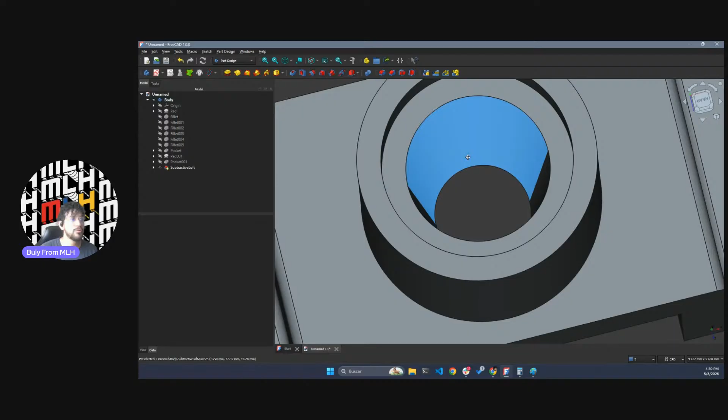Let's take a peek. Ready? 3, 2, 1, ba-dum! And you can see it's a cone, because you can actually see the walls. That means the bottom hole is smaller than the top hole. But you can see it here - there's a hole, there's a cone. Cool, now what else?

What are we missing? Ah yes, this circle right here - can you see there's a hole that goes from part to part? Yes? Can you see the hole here? Let's do it.

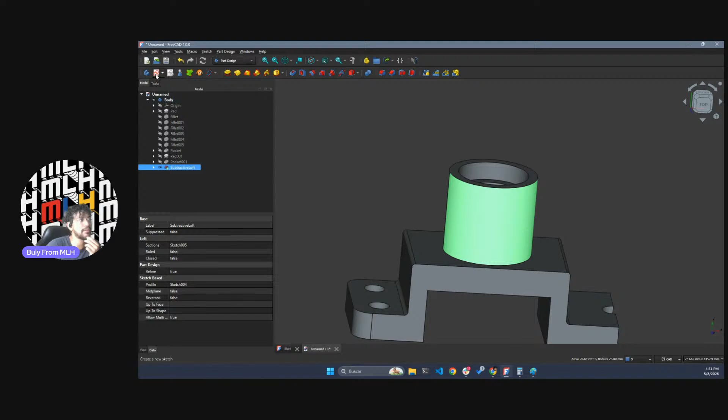Now it's easy, right? Like you just select this one and select this. Ha, is this a bug? Again, select the cylinder, select the sketch. Let's read - it says you need a planar face as a support for a sketch. And that makes sense, this is not a plane - this is an infinite amount of planes to create a cylinder.

The way to do it, the way I usually do it, is either one - you create a plane with this button here. I won't. I think the easiest way, since we know where it is located, it's a hole from point to point, we don't care because we don't have more space or shape in between, so let's create it from here instead. Check this out - create the plane here.

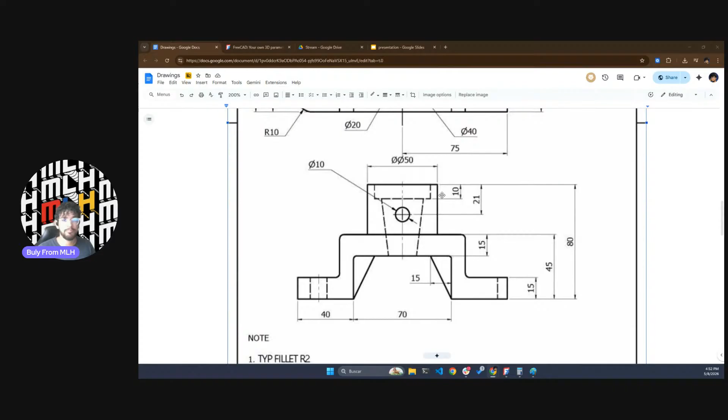Now we just need the circle's diameter and the height. Let's calculate that. Here's the center, and it says: we know that from this point to this point we got 80, and from this point to this center right here we got 21. So 80 minus 21 is the height from this point upwards. Does that click? Does that make sense? Wasn't that too weird?

Let's go again. Point - 80, so far so good. But point to center line, which is here, 21. And here's the point. So we want it from the bottom to the top, from this bottom to this top, we have to subtract 21. So 80 minus 21 is 59.

So, imaginary line, and then going upwards, 59. Okay, and 90. There we go. That doesn't look good. Did I miss the... wait a minute, I think I messed up.

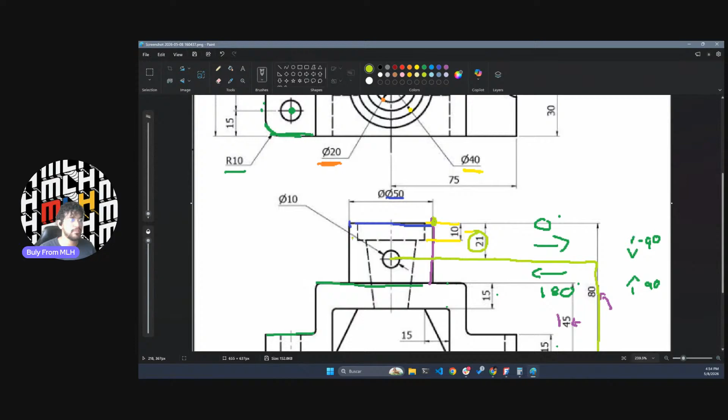Let's create a circle, and I think I messed up with the height of the cylinder. Center - this circle has a 10 diameter. Create a circle of 10. There, I feel that this is higher. So let's take a look. We got this, but now let's go to this pad.

What was this pad? This was a cylinder, 45. No wait, I got it wrong, it's not 45, it's 35. Yes, because it's 80, it's 80 minus 45. So it's 35 in the cylinder. That makes sense, see that?

Now you see that this circle is actually floating, but it's going to be like a laser, it's going to go through the cylinder. Let's do that.

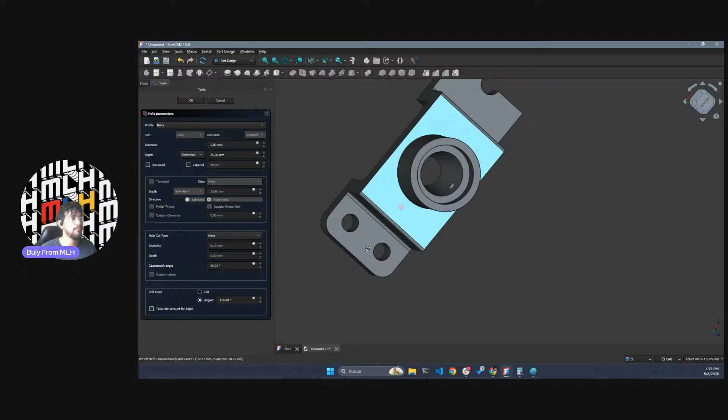So click on this, click on hole, and then it has to do... no, that's why I don't like the hole. Let's click on the circle, click on pocket.

Let's do 60 millimeters. Bottom. Hole. Traverses, and traverses, can you see there? Can you see that?

Cool, now we have a hole. Sorry, it's here, hole, see that? Cool, I think we just finished. Yeah, I think so. Now this is the part.

Now if you want to 3D print this, for example, File, export. Whatever, you have to select the body, file, export. And you can do a 3D manufacturing format.

The format has to be the one that your 3D printer accepts. Usually they accept... there was one standard. Let's see, JavaScript open, no, where is it? I think the 3D manufacturing format is the one. Let's see, there was another one that was a little bit standard, but yeah, no, I think it is.

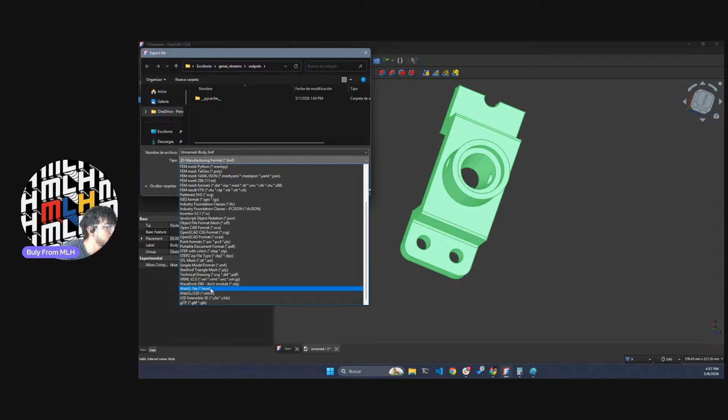Yeah, go with this one, and then you just save it as... first part. Here, voila, we got it.

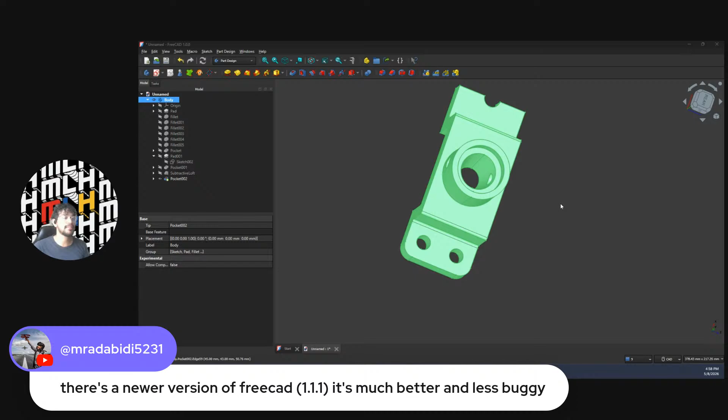Cool, I'm back, okay, awesome. So I know it was a lot. There's way more things that you can do with FreeCAD. There are more versions, as Mr. said. Yeah, if you downloaded it just now, you got the newer version. I have 1.0.0, I have to update it. It has less bugs, but this is how you do it.

Now replying to Nelco: it's difficult when you don't see the perspective of it. Remember this case, you could create a box here, and then a box here, and then a box, and it's just too many boxes. Create the silhouette, 3D. Same thing with the cylinder, create a silhouette, 3D. Use paint to locate everything with colors. It's not easy always, but it's not that difficult, it's just getting some experience.